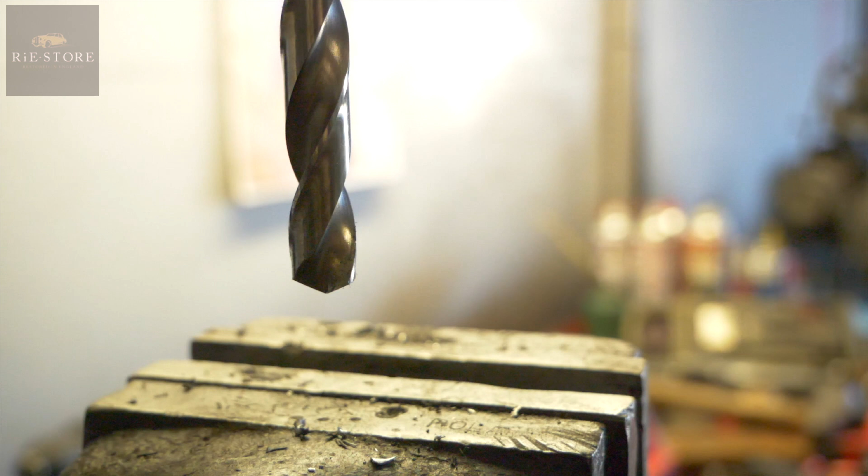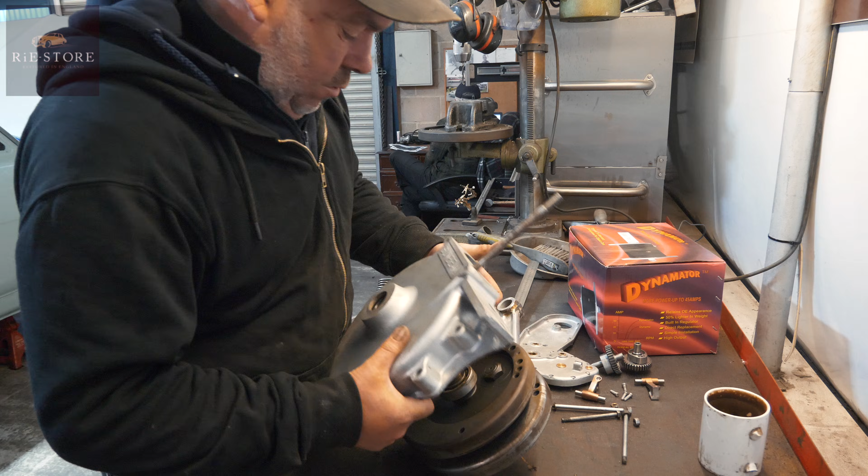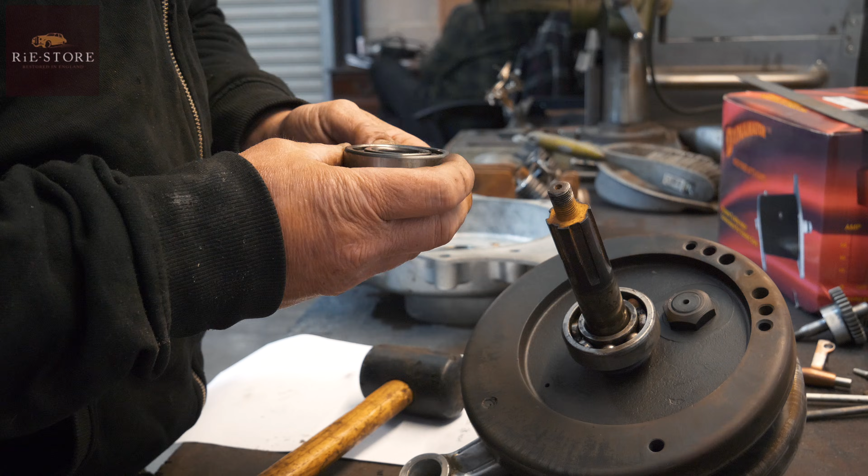So that is the drive side of the engine. You have two of those on there. It should be the same number. I have to get my glasses.

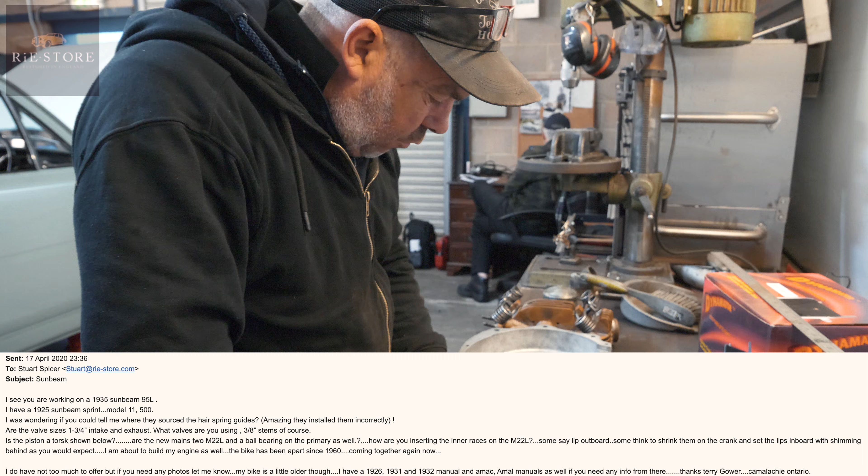Questions we've got are: Are the valve sizes 1 3/4 intake and exhaust? What valves are you using? 3/8 stems, of course, which they are. Is the piston a Torsk as shown below, which it isn't?

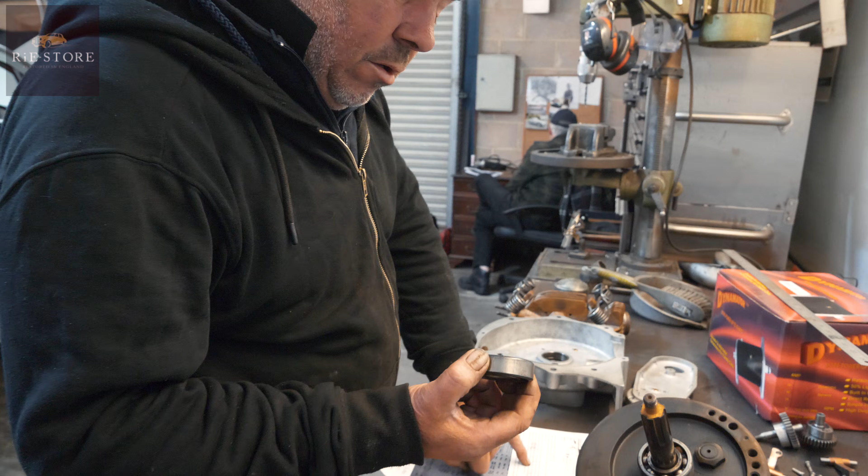Are the new mains 2 M22Ls and ball bearings on the primary as well? How are you inserting the inner races on the M22Ls? Well, these obviously aren't M22Ls, they're different, because I think the M22Ls were split bearings - some say lip outboard, some shrink them onto the crank and set the lips inwards, shimming behind as you'd expect. But this doesn't have that. So all we can do is show them what we've got.

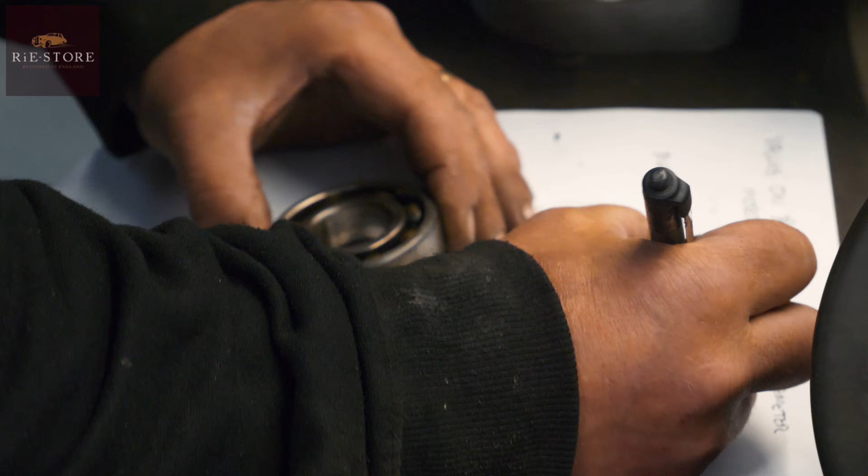So the bearings we've got - find the buried pen - on our drive side, they are Hoffman. There's no overall part number, so it's Hoffman L10 V2 by the looks of it.

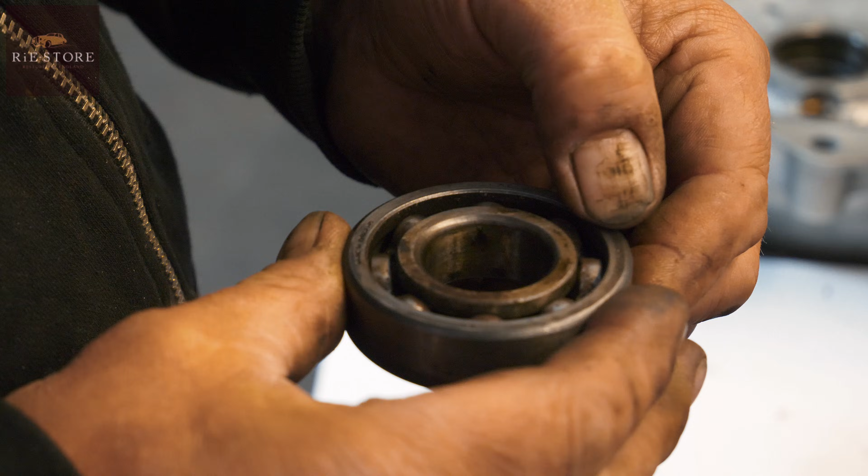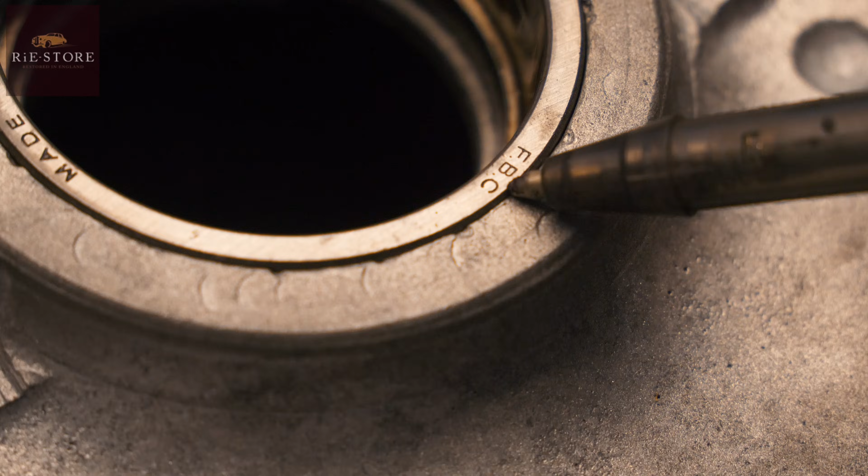So that's got two different bearings in it. Obviously, like I say, we've got to replace them all anyway. That's a Skefco, whatever that is - I've never heard of them, made in England, but go with that one. That's a good size, fits nicely, you can feel them - they're not good. And the bearing on the other side, on the primary drive side or timing side, is FBC, and it's an MCF22, which is probably a different version of that M22L maybe. Who knows?

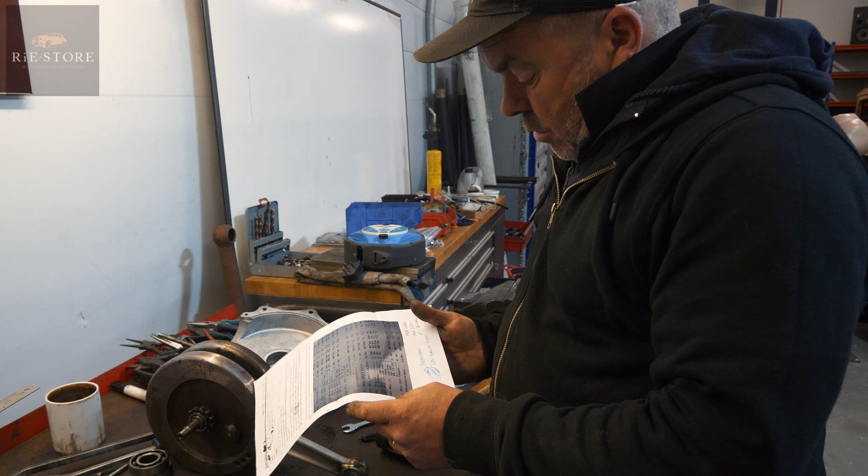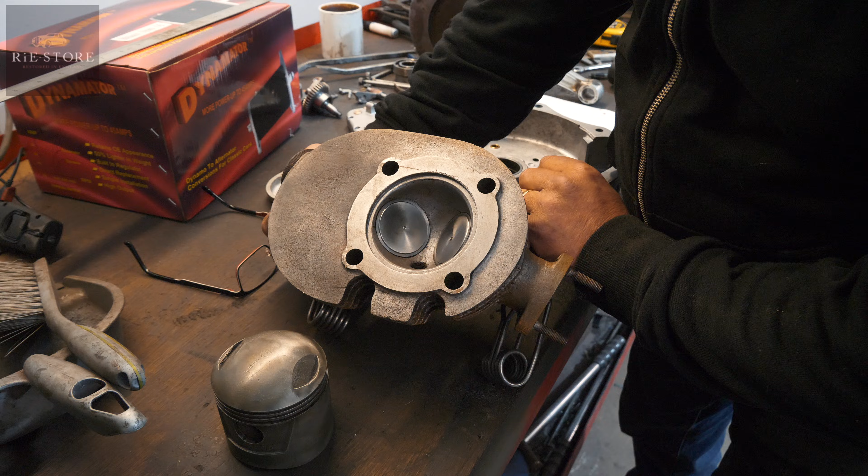Right, so what did we want to know? Oh right, the piston, that was it. How the bearings are fitted - well you can see how they're fitted on ours, so that's all he needs to know. The valve sizes I've written down for him, I've measured those already - they are 1 3/4 each, inlet and exhaust, 3/8 stems.

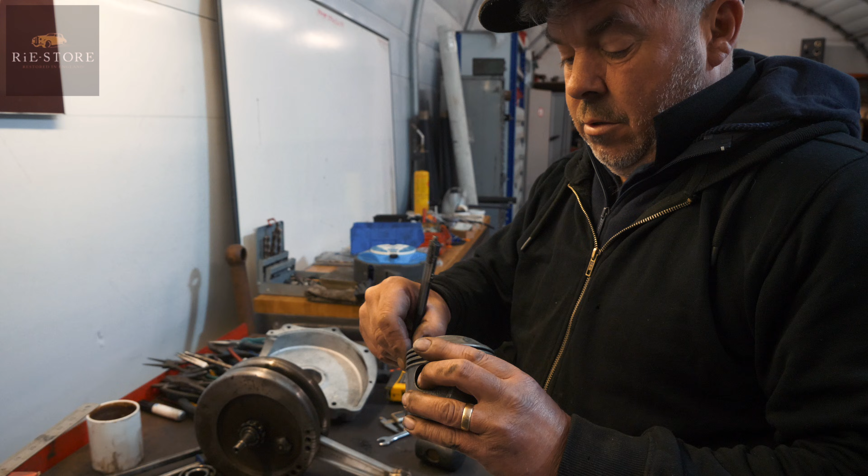Right, the piston he was asking about - our piston is a Specialloid. I can only give him what information I've got. This might not be original to the bike, I don't know, but it certainly fits very well, and it's the right dome top with the valve cutouts. It is 80mm, but it's on a +40, so it would be slightly larger. You can see I'm going to have to take some material out of here.

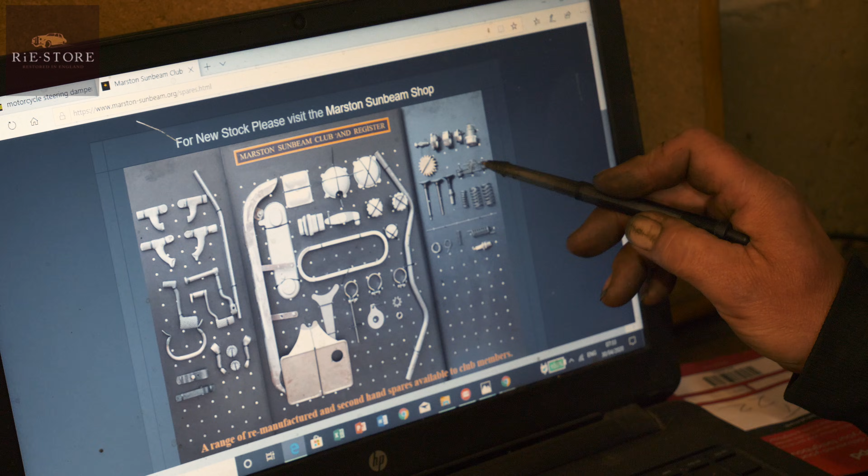I haven't checked any of this yet, it's only just been thrown together to make sure we've got all the parts and information of who made it all - Marston Sunbeam Club spares and parts. They recast a lot, so you can get your valves, your valve springs, your hairpin valve springs, new exhaust castings. Does quite a few bits, but the guy's name is Chris Odling, that's the guy, yeah.

He will make valves, valve guides, valve springs, new collets. So from what this guy needs, that should do him. He's a very, very helpful guy - really nice guy.

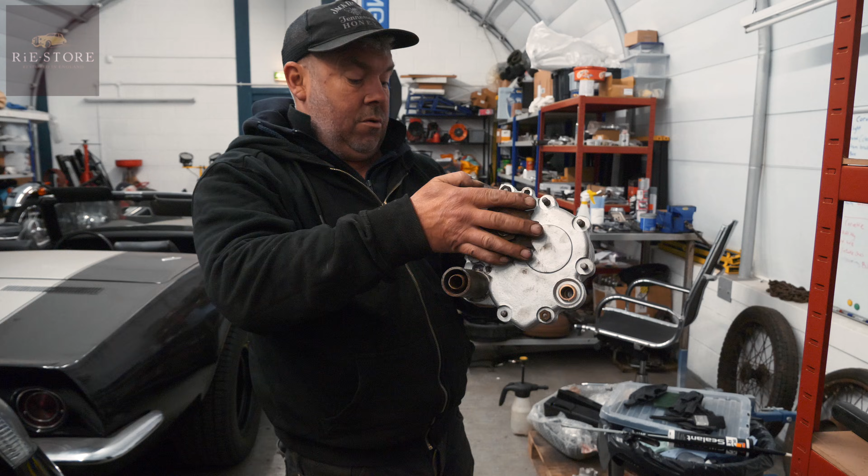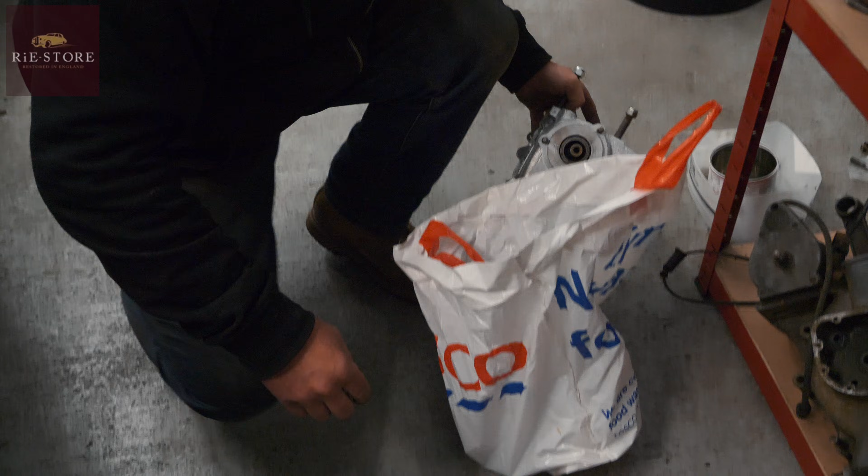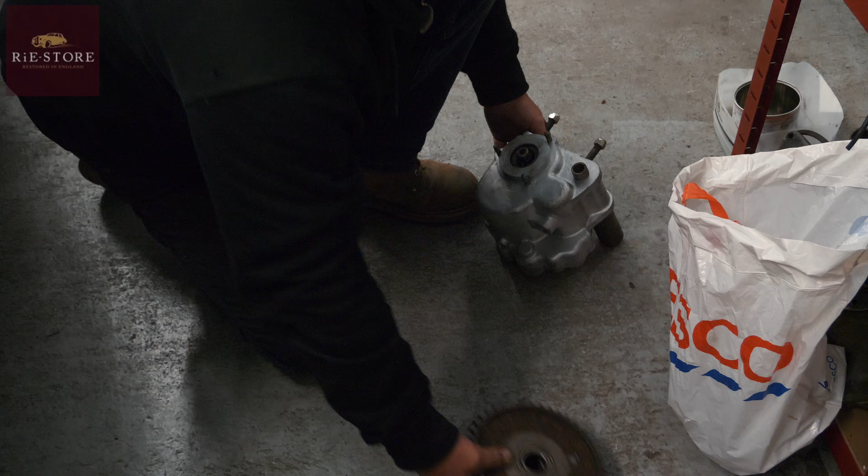Right, this isn't put together properly at all. But basically, that's your gearbox shell, your clutch sits on there, driven by the engine. There's a plate that goes on there, which on a 95L would have a kickstart ratchet on it, but on a 95R it doesn't. So that will sit on there like that. We've got the clutch bridge, some cork plates, some plain plates.

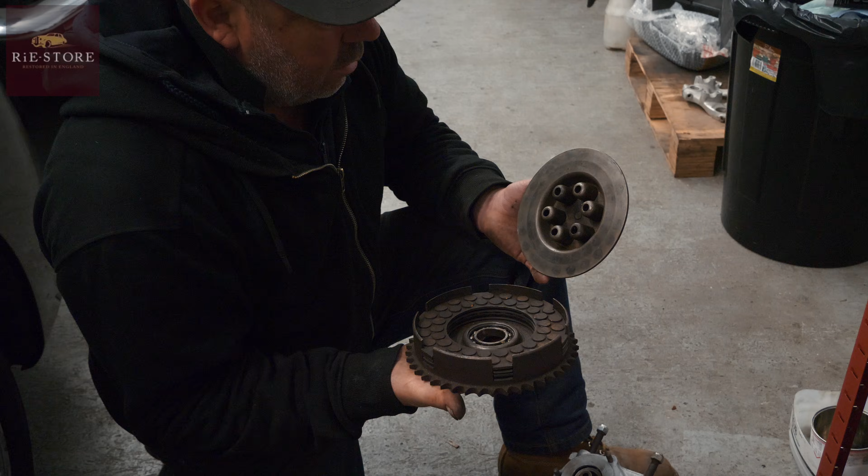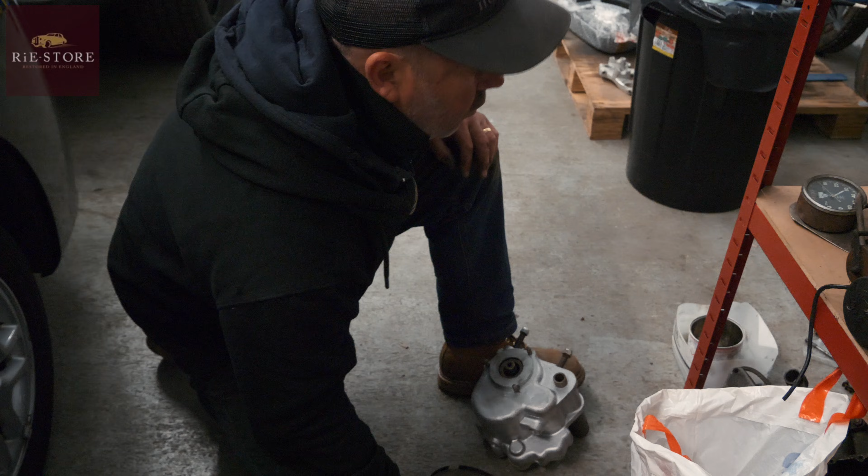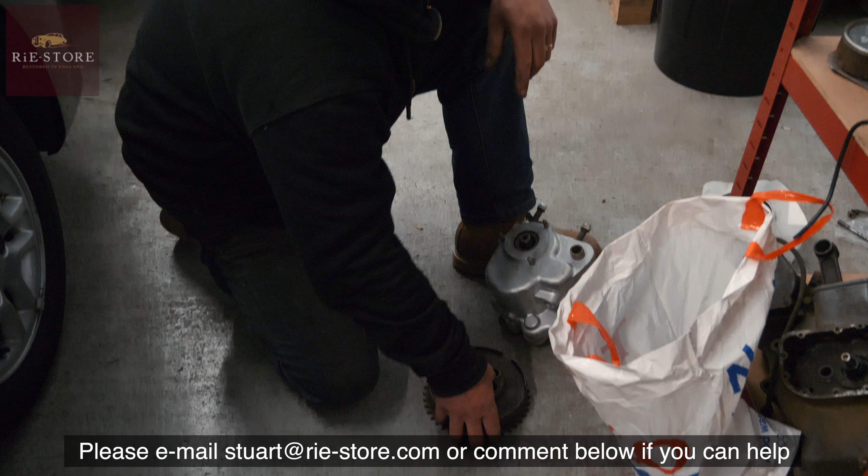But there should be an inner clutch basket which goes in there - fits in there, and those 6 springs, that's your clutch pressure. So there's an inner clutch basket which we're missing completely, and on the front of the crankshaft there's something called a cush drive that goes on the front of the crank and drives a chain that goes around the clutch there. So we're missing all of that as well.

And then there's rear set parts, because we're turning it into a 95R. Oh, there you go, look. We've got to get mudguards, clutch, handlebar controls, front cush drive, handlebar grips, knee pads, rims, speedo we've got which is rarer than rocking horse poo, carb we can buy, mag we can buy, brake pedal I can probably make. We've got all the plans for it here. Chris Odling also supplied all this.

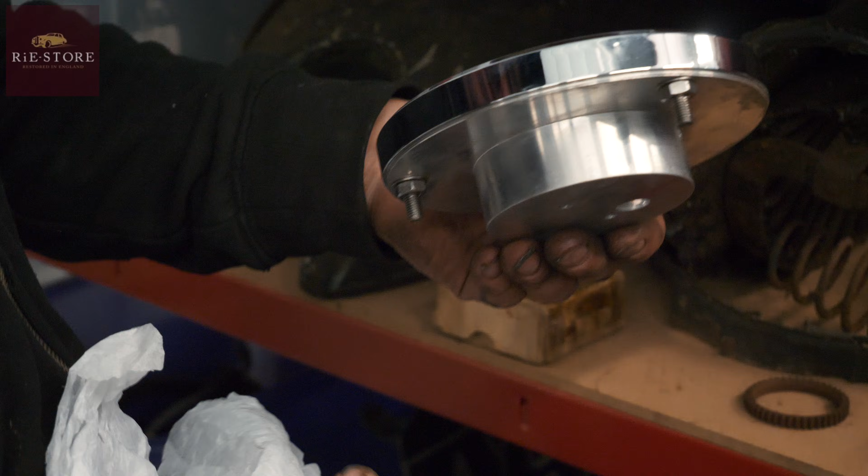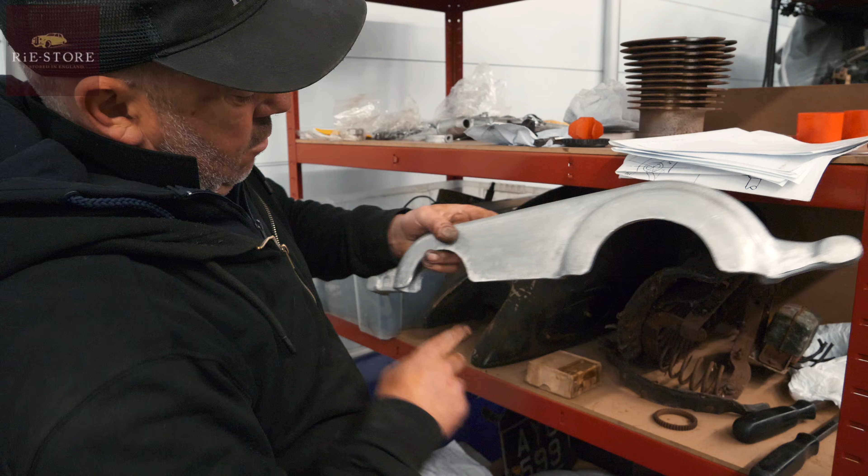So that's the mounting bracket, goes on the top of the forks that Chris supplied. Primary drive chain cover, so that's where that clutch basket sits in there. And that's your primary drive with that cast. This is the rarer than rocking horse poo bit. That's the speedo face.

I'd say anything above that first line at 45 will scare the crap out of you, let alone go 90 on it. So at this present moment, is there anything else specific that you would be looking for?

It's just clutch really, isn't it, more than anything? Clutch and cush drive, everything else I can get made, or I can make. Even if we could borrow one for someone, we could get one fabricated. So that would help, because as it stands, we've got nothing to actually go on.

So that's the issue. Because the other thing is, the R is different to the L, the setup's different. One has cork plates and the other has what they call Ferodo linings, so it's a dry clutch, not a wet clutch.

So if we go in the other unit, I can lay these out then. A lot of walking around this one. Getting your steps in? Yeah, 10,000 a day.

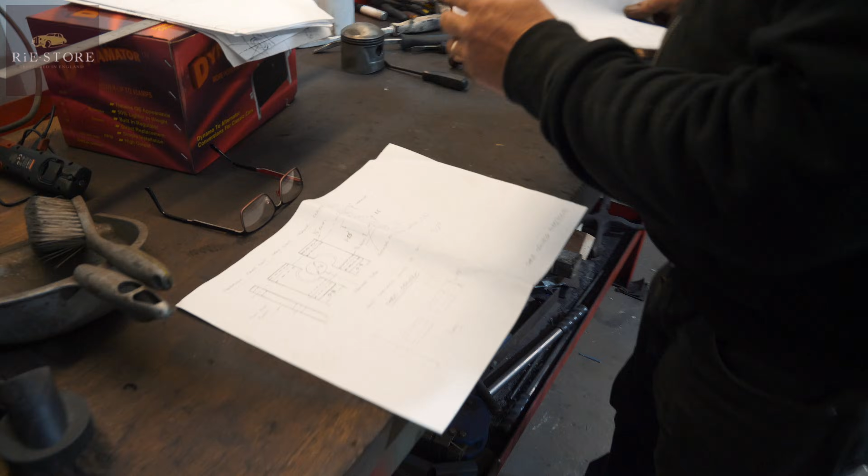It's hard to explain, but on a normal bike you have your foot pegs come up, but this has got all the pedals further back, rear sets, so you've got to make all your bits for it. So that's your near side frame clamp, which just holds it, and then that will hold your rear footrest and the back of that aluminium chain guard casing.

That's the dimensions for the rear brake pedal and the cross shaft and your arm. So at least I've got drawings, you know what I mean, so I can get stuff made.

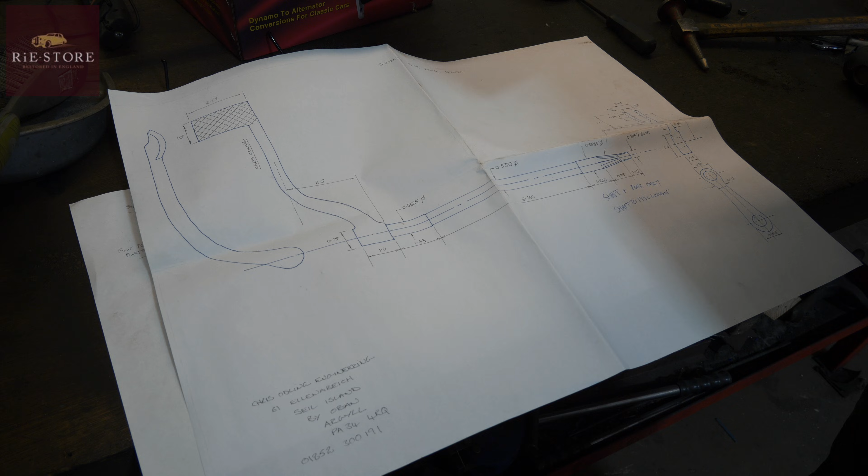I've got good engineers. So that's for your brake pedal, because normally on a Sunbeam the brake pedal's a forward facing one. It pivots off the front of the frame where the engine's mounted, and you just put your foot down on it like that. But this is all completely different. It's rod instead of cable as well.

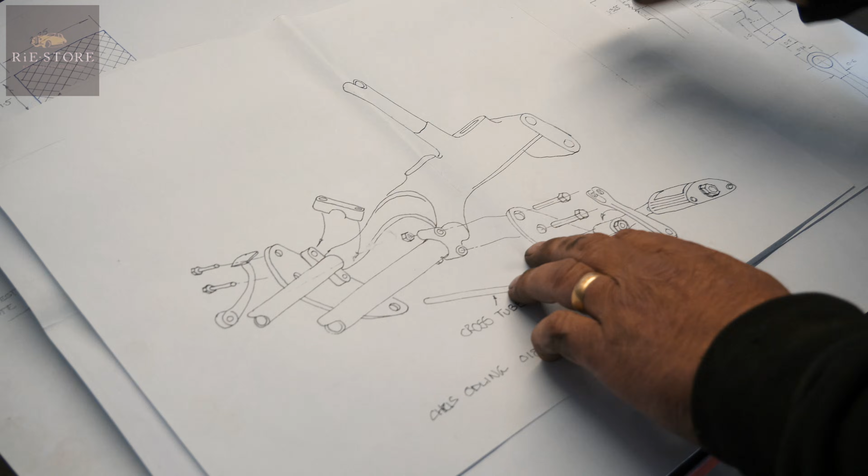That's your M90 95R footrest hanger, 1931 on. And there's a plan view, an overall view of what everything does. So that's your frame with your gearbox mounts. Those two holes are already there.

So you get that plate, put that hanger on it. That's your brake cross tube. That's your brake lever, that plate, and then that clamp there. Yeah, is that, so then we've got...

Dimensions of, see that plate there? That's that and that. That's your pivot bar, is your brake arm stop, which you've got there, and that is your gear lever.

So they're all the bits we've got to get made, but it looks horrendous, but that ain't the end of the world. It's just basic, well, basic, but it's just engineering, you know. It's not an issue because you've got something to copy.

But the clutch and the cush drive, we haven't got anything. We've got spare engines in there with spare crankshafts, but they're taper drive, not tooth drive, and things like that. So, it's really useful, isn't it?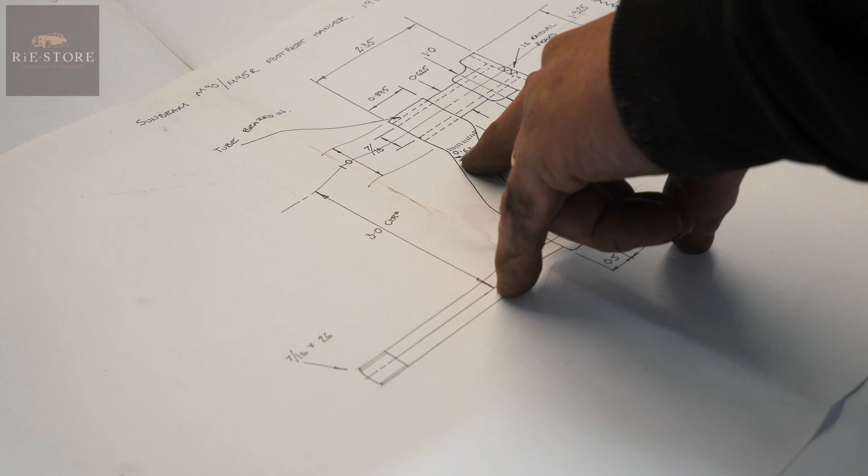Yeah, like I say, that Chris is a really nice guy, really helpful. Charged us £35 for that set of drawings, that's nothing. Down to like, this isn't like most people go, oh, it's half inch, that's 625 thou, and that's 895 thou. It's very specific.